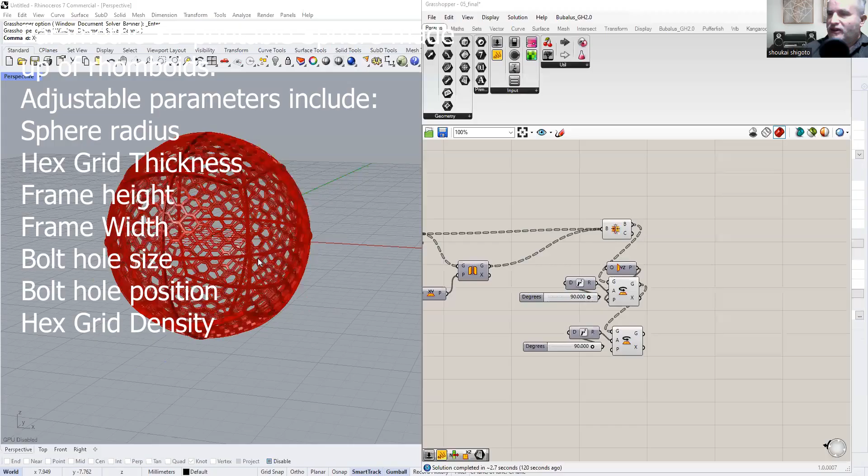Let's go here and share screen. Here it is, here's our sphere. This sphere is made out of 24 rhomboids, which are bolted together. I will explain more just ahead.

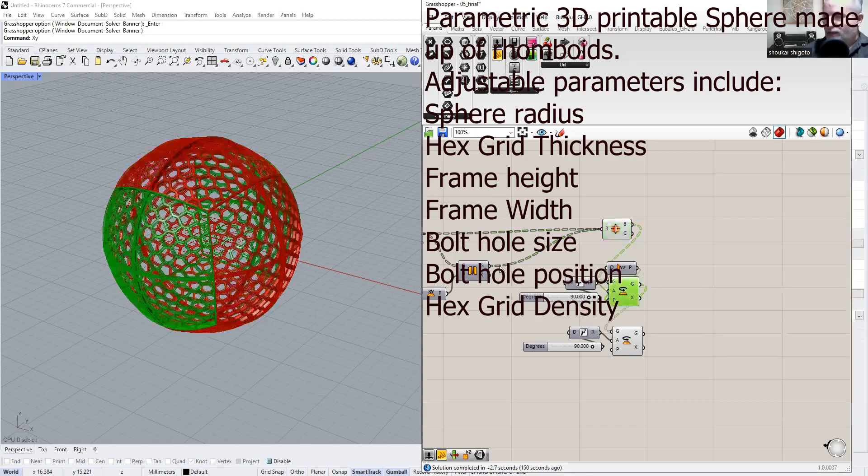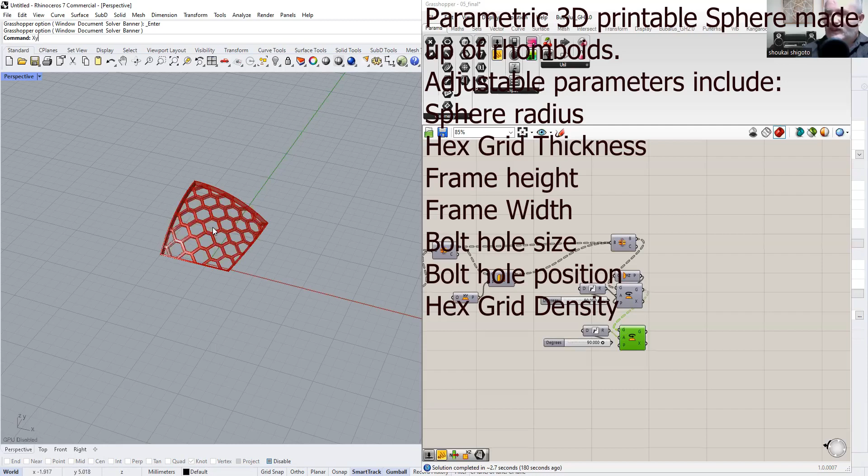So let me show you, all we have to do is design one rhomboid. This is a rhomboid, it's like a square, but with slightly different dimensions in the sides.

And you can see it has a hexagonal grid. By having a hexagonal grid, that allows you to see the inside. You can use this sphere for many different purposes.

You can use it for sphere-based motion simulators, such as the Nova 360 or the new Spider motion simulator. You can also use the same approach to build yourself a Virtusphere, the one that's a motion simulator but you get inside and you walk.

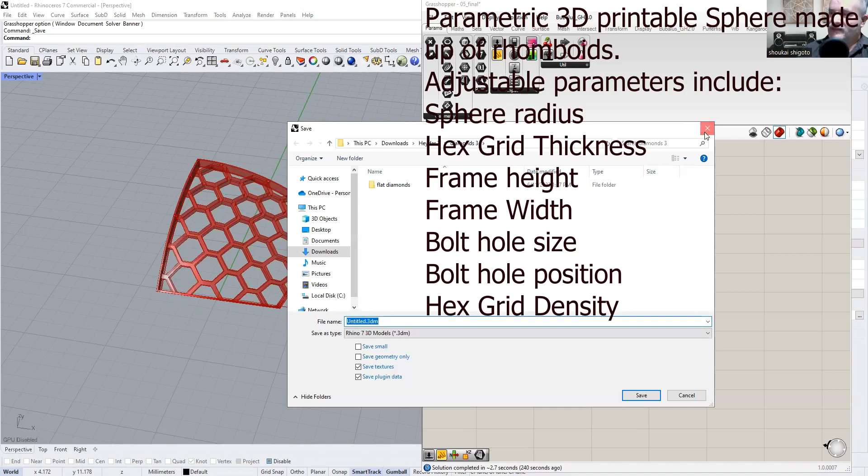It's mostly used for shooting games. Okay, and now one of the great features of this kind of sphere is that you can adjust the size of its main features.

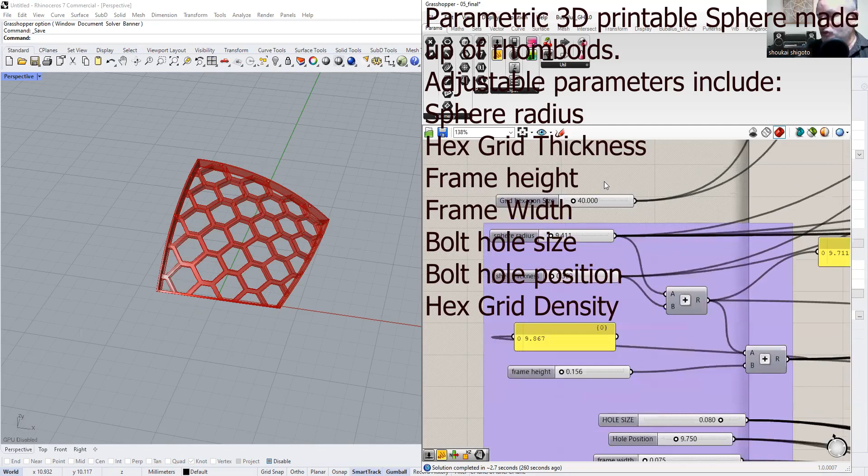Like, for example, we can adjust the size of the sphere. I'm not going to do that right now because the program is kind of heavy and it would take a few seconds to update. But let me see.

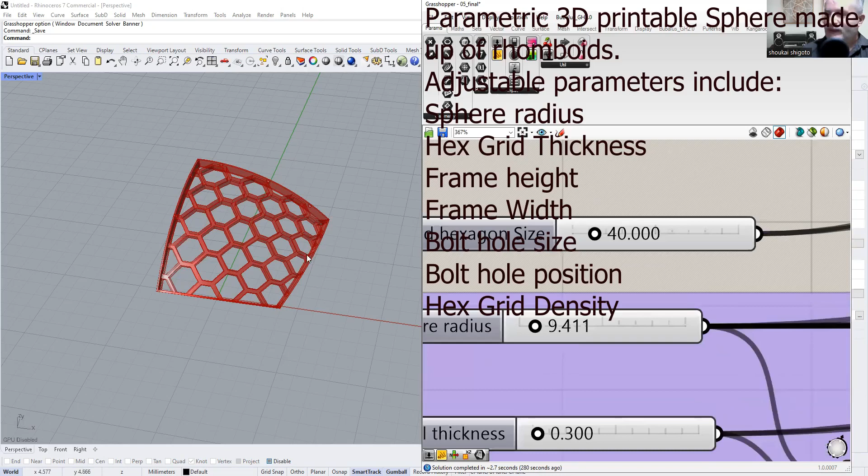What makes the program a little bit heavy is the number of hexagons we have here. The smaller the hexagon size, the more hexagons we are going to have, and that makes it heavier, the slower.

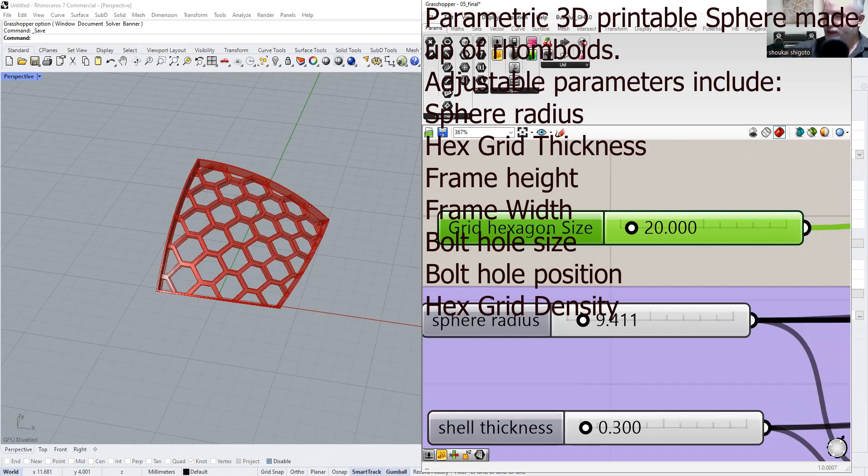So what I'm going to do is increase the hexagon size by 2, so we're going to have half as many hexagons. Oh, that's not supposed to happen. Hang on, let's see if we can fix it. There it is.

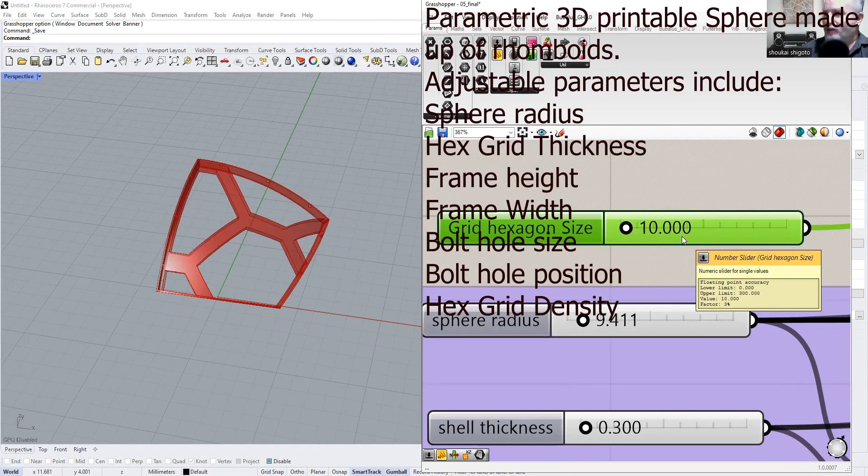As you can see now, this hexagon size is much larger, which means we have fewer hexagons. That allows us to manipulate the other parameters without having to wait for the program to update.

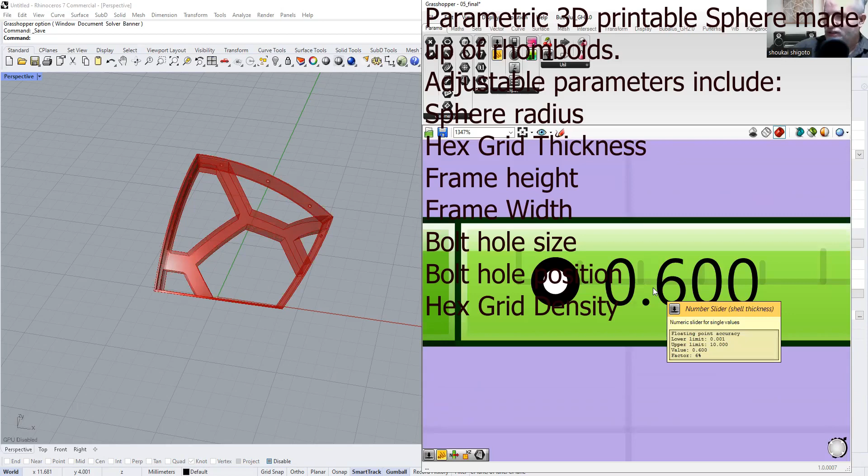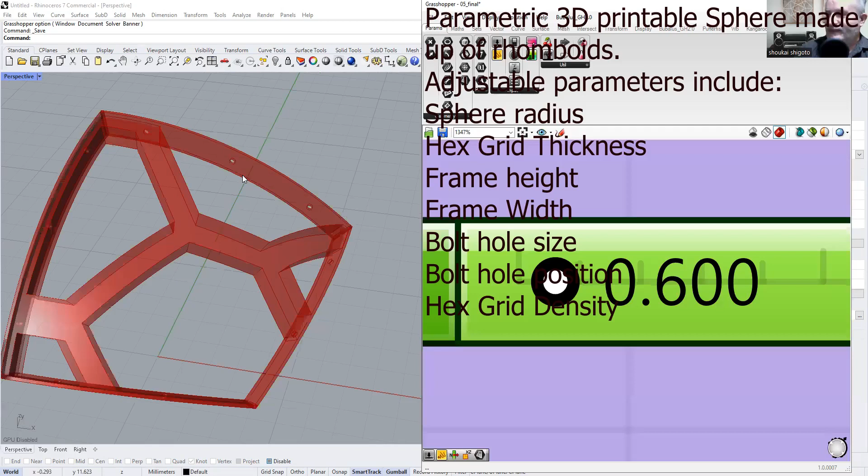So, for example, here I can adjust the shell thickness. Right now it's at 0.3. Let's see what happens if we move it to 0.6. Do you see the shell thickness, which is the same as the grid thickness, it doubled. Also the frame thickness doubled at the same time, and the hole position also adjusted accordingly in proportion.

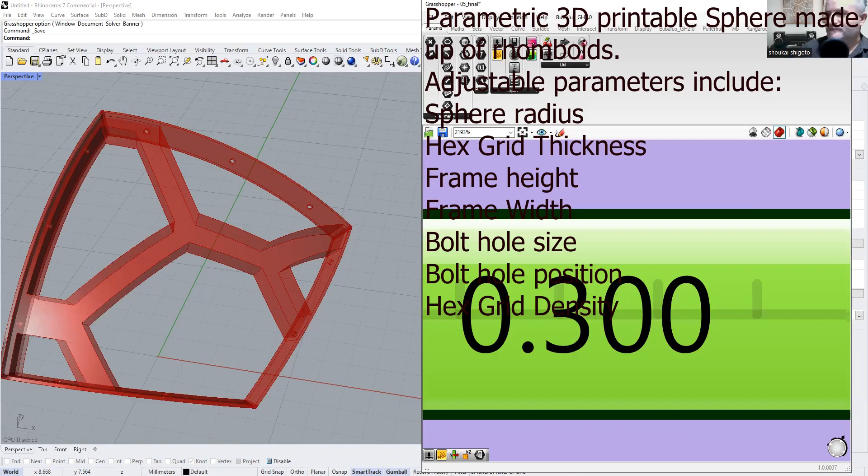Now, for example, if I want a larger frame height, I can go here and let's double this one, let's make it 3. Okay, you see now the frame height updated by itself.

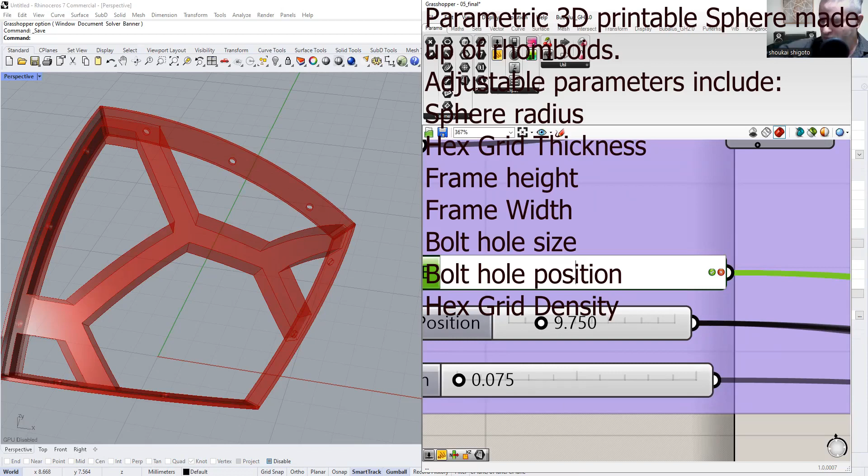We can also adjust the hole size. Let's make this twice as big. So right now it's 0.08, let's make it 0.16. Okay, let's even make it bigger, let's make it 0.4, just to make it more noticeable.

It has a maximum right now, so let me adjust the maximum size. Let's make it 5. Okay, so now we can increase the hole size. You can see how the hole size increases, and this is helpful because it gives you the opportunity to decide what size bolts you want to use.

We can also adjust the hole position, whether we want it closer to the center or far away from the center. This is also very important.

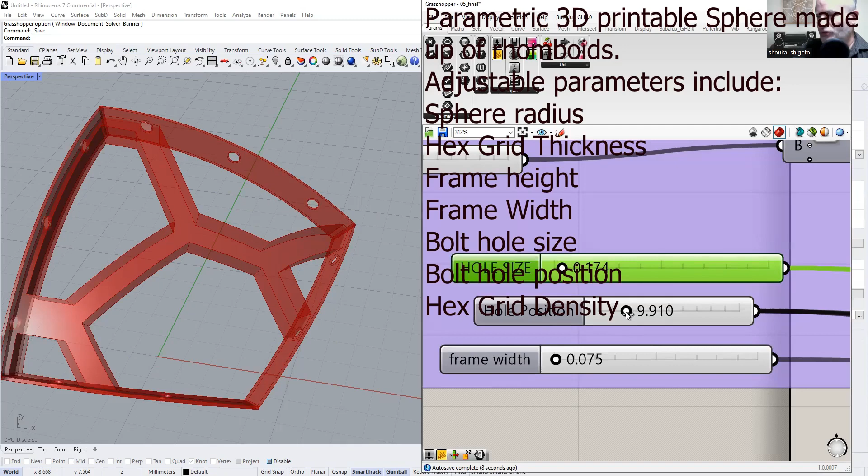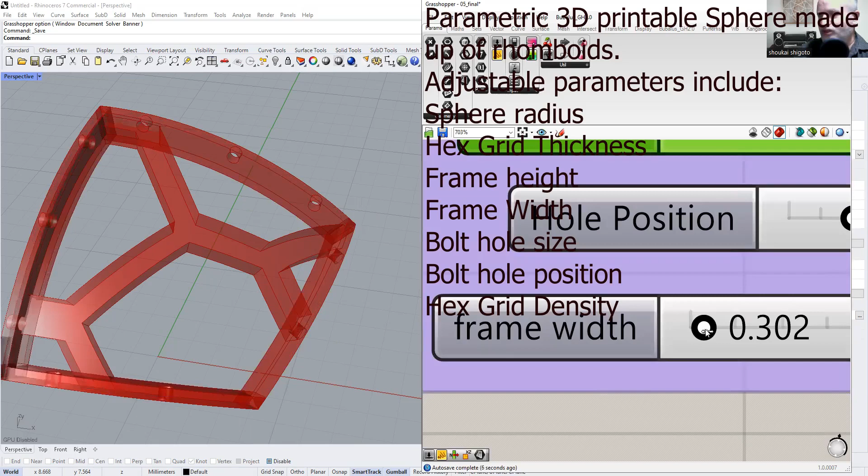And now we can also adjust the frame width. So if we want a stronger frame, then we make it thicker, and you can make it as thick as you want. You can see how the holes stay in the same place. Everything stays in the same place as we adjust.

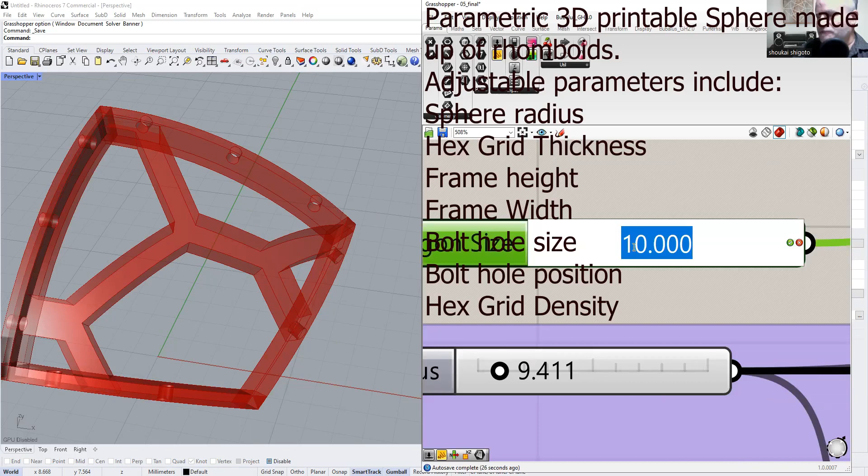Once you have made adjustments to all of these parameters, then we can increase this—the last parameter we want to manipulate. Because when we increase the number of hexagons, the program gets really heavy. So let's go ahead, and now we're going to have to wait.

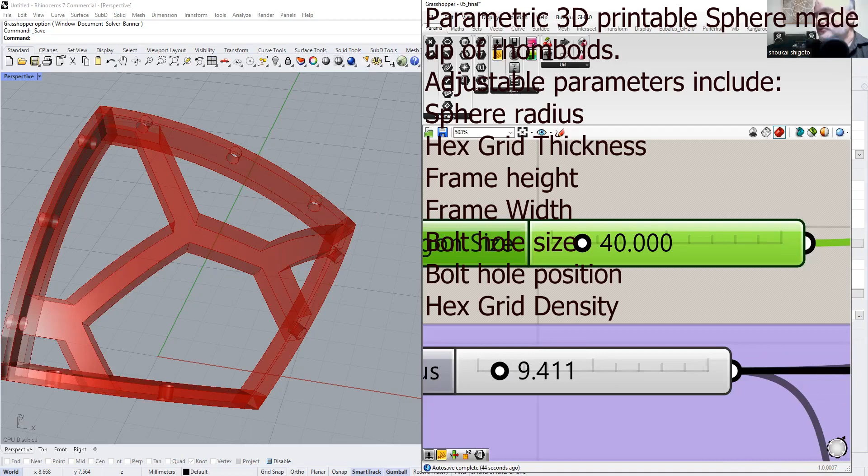Oh, we didn't have to wait that long, because we only increased it to 40. But if we want more, let's see what happens when we ask for 60. Now we're waiting... 1,000, 2,000... okay, there it is, 60.

Let's bring it up to 80. And here we go: 1,000, 2,000, 3,000, 4,000, 5,000, 6,000. There it is, and we can keep going.

Let's try to go all the way to 120. 1,000, 2,000, 3,000, 4,000, 5,000, 6,000, 7,000, 8,000, 9,000... now it's taking forever.

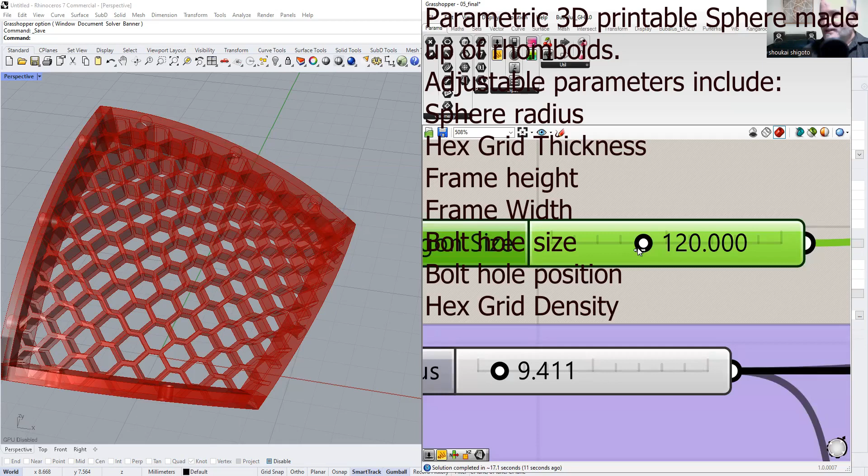Okay, it finished updating the number of hexagons. That's great. So once we have one rhomboid, all we have to do is print 24 of these, and we'll have a sphere like this one, for example.

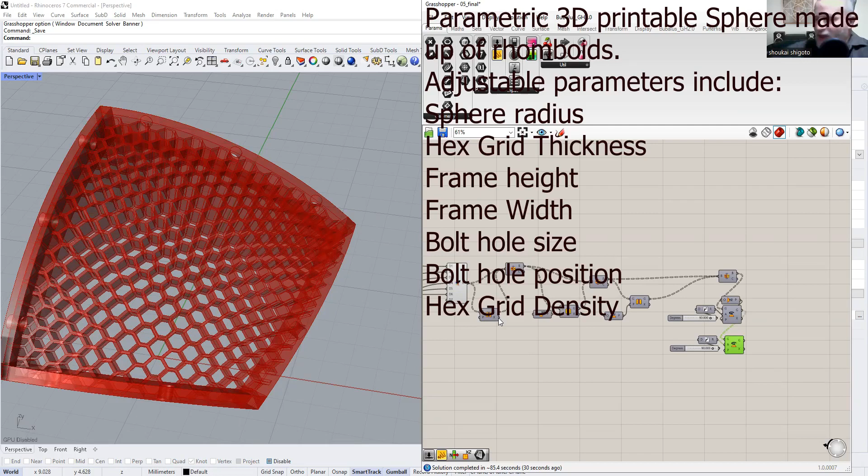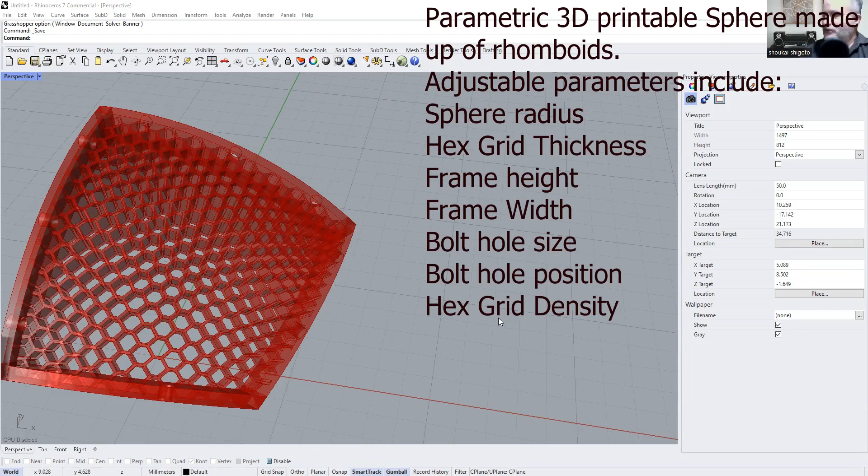Right now we still have a very high number of hexagons, so it's going to take forever to update. I should have lowered the number of hexagons before attempting to preview any more forms. But there it is.

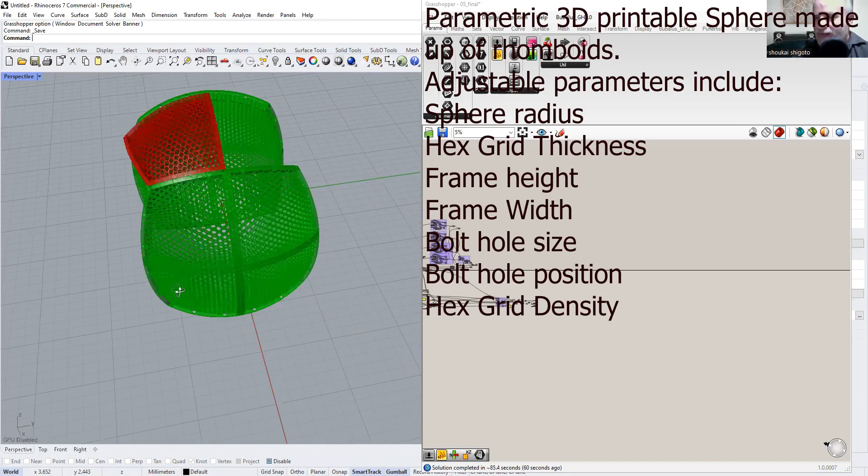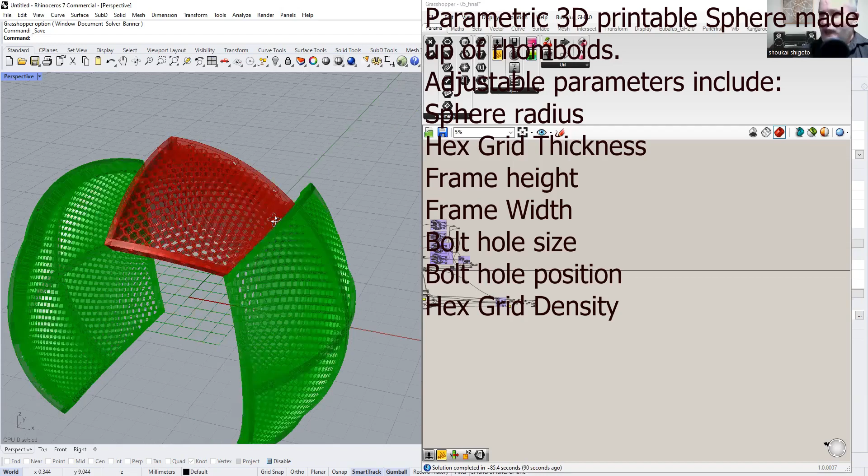Okay, so now you can see how, when we start to add more rhomboids, the sphere starts to take shape. So to complete the full sphere, all we have to do is keep adding rhomboids. These rhomboids can be bolted in, and this is a really good configuration for creating 3D printed spheres of any size.

Of course, the bigger the sphere, the thicker the shell needs to be, and the thicker and higher the frame width and frame height have to be. But there are ways we can reinforce our sphere, and I'll explain that in a later video. We can have very robust, very resistant spheres by adding what I call my trade secret, and I'll let you know about my trade secret for creating very strong, very resistant 3D printed spheres at a very low cost.